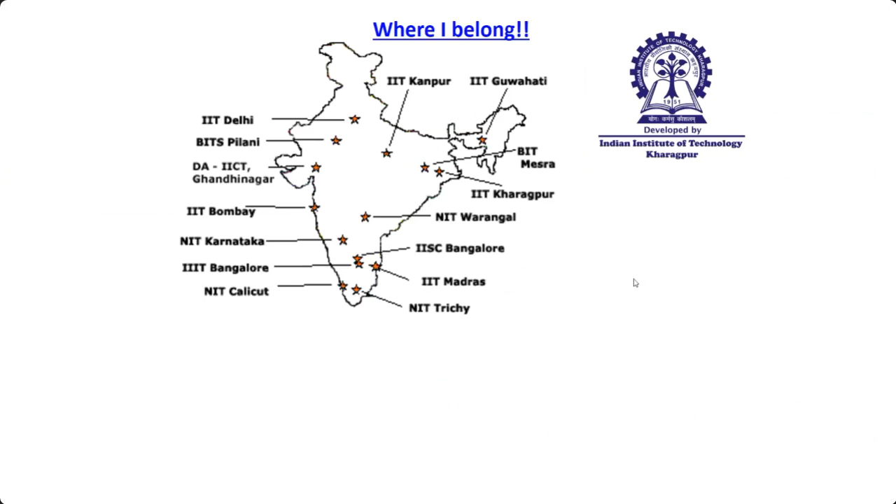At the first point, let me show where I belong. I come from this IIT located at the eastern part of the country. This is the first IIT for the entire IIT system, established in 1951 by our first Prime Minister, Pandit Jawaharlal Nehru. We have a strong history in that our campus is actually located in a Hijli detention camp, which was a jail for the freedom fighters of then-dependent India. When the motto was to create a university which could cater to the strength of the country, it was developed here.

Our institute's main motto is inscribed here as 'dedicated to the service of the nation.' We strongly believe in those aspects.

The broader research activity we do is basically to correlate the microstructure and mechanical properties of materials - different kinds of materials. We work extensively on nickel titanium based shape memory alloys with wonderful properties, on titanium based intermetallic alloys capable for high temperature applications in aerospace industries, and several other titanium alloys. Of course, metallurgy always stands on steel, so steel forms our main pillar. There are several categories of steel we work on, as well as super alloys, both conventionally processed and additively manufactured.

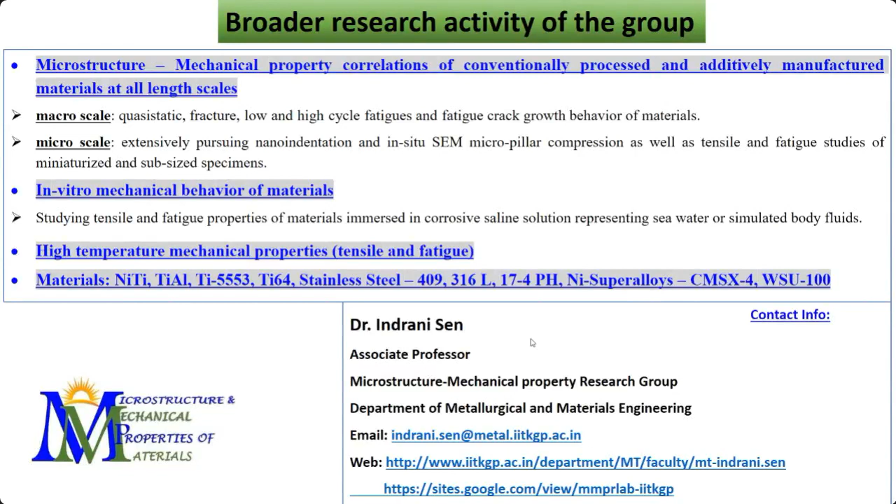So when we, as metallurgists, talk about process systems, we think of several kinds of processing operations for a component, like casting and different kinds of machining, which are inevitable. These are some of the ways by which we try to give a block of material a particular shape. We apply several kinds of machining operations like turning.

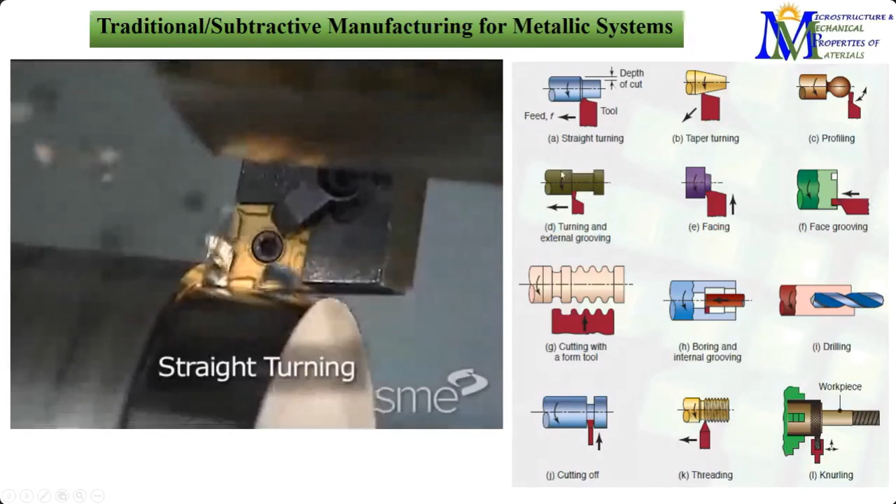Let me just show a video, and since there is no sound in it, I will explain it myself. You see, this is a kind of straight turning where we apply the tool to turn continuously so that we can give it a particular shape. In the process, you can see that there is a lot of chips coming out.

So this is another way of turning that is being shown. Several kinds of operations include taper turning, where we can get a taper, something like this. Of course, there is a lot of mechanics behind each of these operations, and I'm sure you might be familiar with them.

So what we can see here is that to get a nice shape for the purpose it is meant for, after casting the materials, we have to go through a severe amount of processing to give it the final shape and the required properties that it is meant to have.

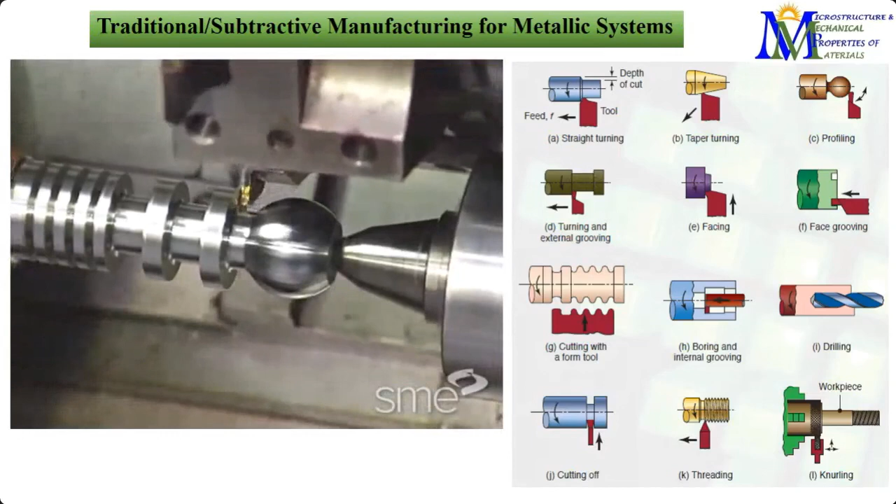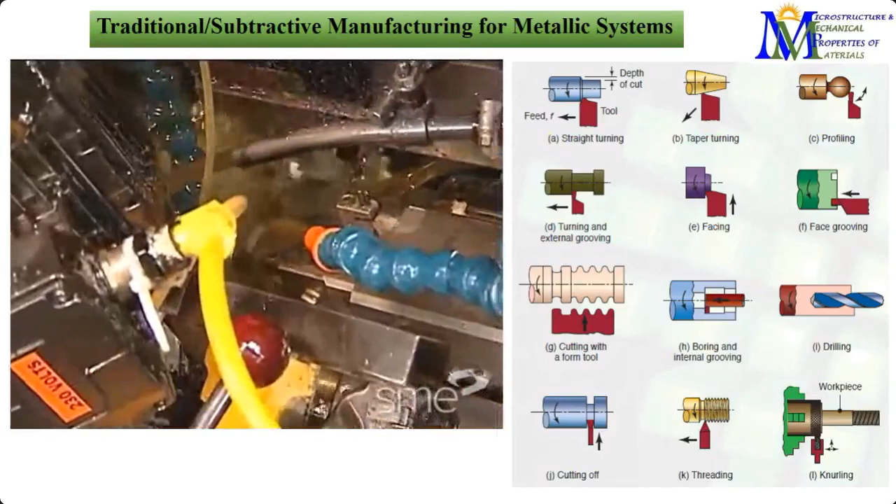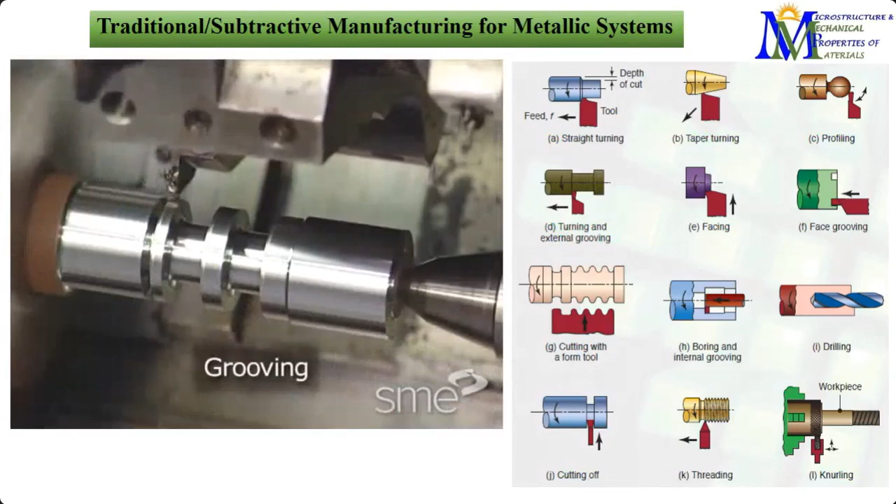So this is a kind of forming operation. And chamfering, which is necessary to give it a 45-degree inclination. And this is grooving - often we need to do internal grooving as well. Threading, you can see the threads very distinctly here. So these are the different operations that we need to do.

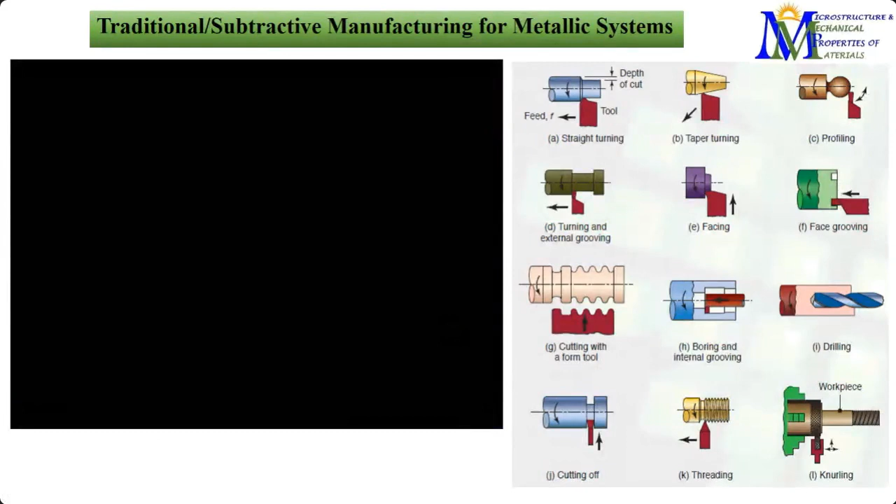But when we think of that, this is associated with a large number of problems, in the sense that we always strive for better material, meaning higher strength and hardness. So the higher the strength of the material, the tool needs even more hardness compared to that. When we are continuously machining, there is a huge amount of tool wear. So there are a lot of studies going on to make the tool material strong enough to handle components of materials like super alloys, which are much stronger, and we need such kinds of tools. Wearing of the tool is a huge issue.

There is, of course, undesirable chip formation - you see the chips everywhere. We need to do some after-processing to get rid of this chip, and basically this is just a wastage of material. We have to waste more than 50% of the material just to give it the final shape, which is very challenging considering the entire cost of the component. So this is how conventional subtractive manufacturing works - we have a block of material to which we give the particular shape we want, and in turn there is a huge amount of material that is just wasted.

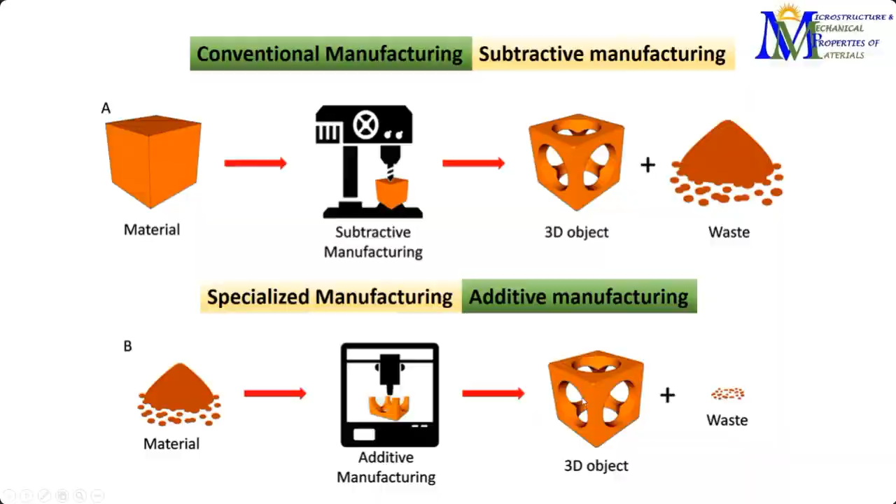So basically, subtractive manufacturing is nothing but a top-down approach - we start with the bigger piece and gradually move on to the shape we require based on several kinds of operations. On the other hand, additive manufacturing starts with the powder, so it's a bottom-up approach. We start from the lower level and keep on adding layer by layer to finally reach the shape that we require.

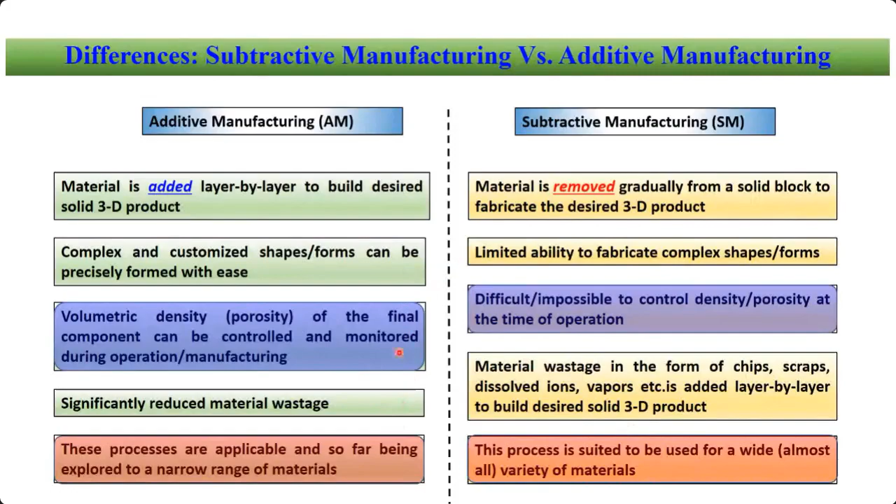Now moving to additive manufacturing itself, we have already established that it is the future. There are a lot of opportunities and several things that need to be explored. We also need to understand the challenges—of course there are several advantages, but what are typically the challenges that need to be overcome. First, we can get complicated shapes, but it is very challenging to have fine accuracy at every nook and corner. Often the surface finish is an issue, and we need to ensure a suitable surface finish.

Now, from both the metallurgist's and mechanic's point of view, when we think of a particular application, let's say aerospace, we are very much concerned about properties like fatigue—how the component will behave under cyclic loading. If we are not able to ensure proper surface finish, that will be very detrimental for the fatigue performance of the material. So we can have a complicated shape and all different kinds of benefits from additive manufacturing, but we can still end up with early failure if we don't ensure this particular aspect.

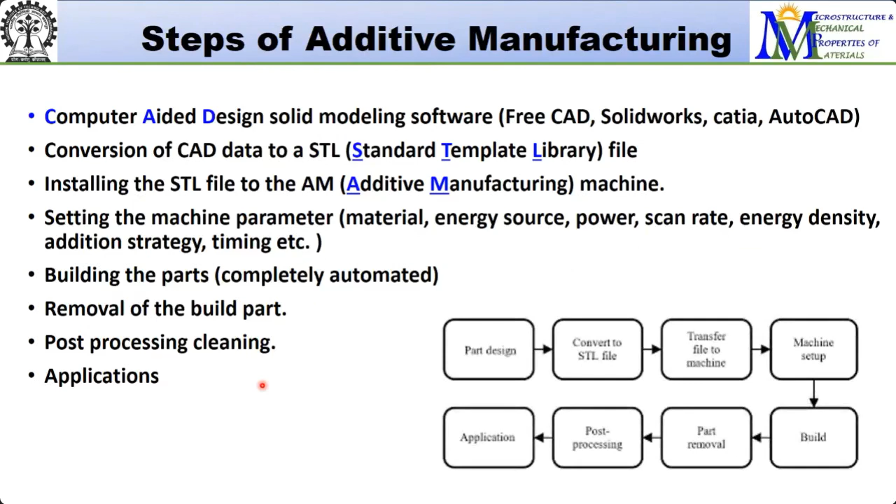Okay, so these are just the flowchart for that.

There are different kinds of additive manufacturing processes. According to the ASTM F42, there are seven different ways. Out of that, the ones mostly suitable for metallic systems are the powder bed fusion or powder feed technology. Amongst the powder bed, there are different kinds: electron beam melting, selective laser sintering, selective laser melting, and direct metal laser sintering. Whereas in case of powder feed, we have LENS, laser engineered net shaping, and direct metal deposition or laser metal deposition. These are the principal operations that we use.

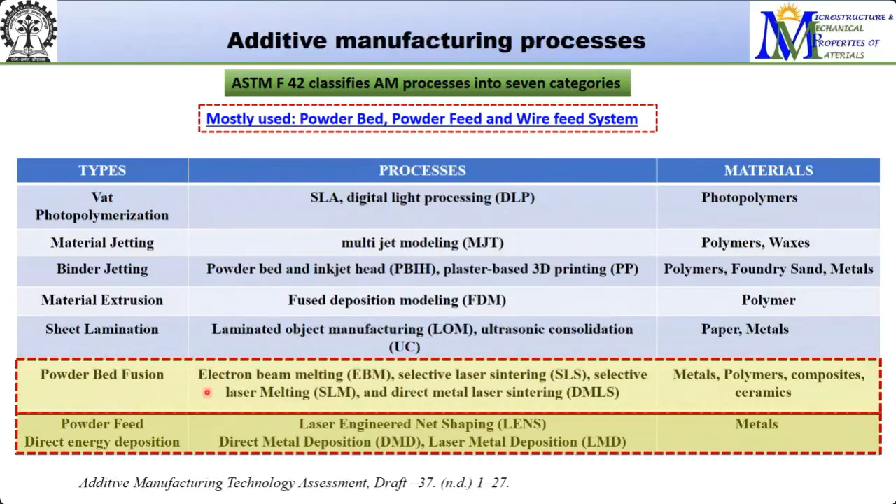Basically, we have different kinds of heat sources: laser beam, electron beam, plasma arc, gas metal arc. All different things are used as energy sources, and out of that, laser beam is the one which is mostly used. Electron beam is also very much used, but laser beam is the most widely used.

As I said, the major two types of additive manufacturing techniques mostly used for metal additive manufacturing are powder bed, where we have a nice bed of powder and the energy source travels as per the design, and we get the product out of that. In case of direct energy deposition, often called powder feed, the energy source as well as the powder stream act simultaneously as per the design, and then we get the final product.

So these are the different techniques for powder bed as well as powder feed. I would like to show these two different things, one from each category, to show how these are being done.

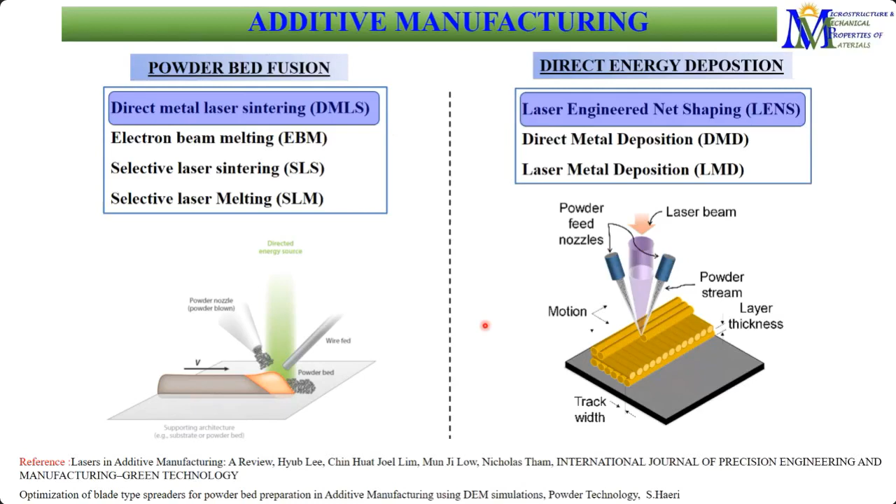Okay, once again I'm having a video here. This is for the direct metal laser sintering.

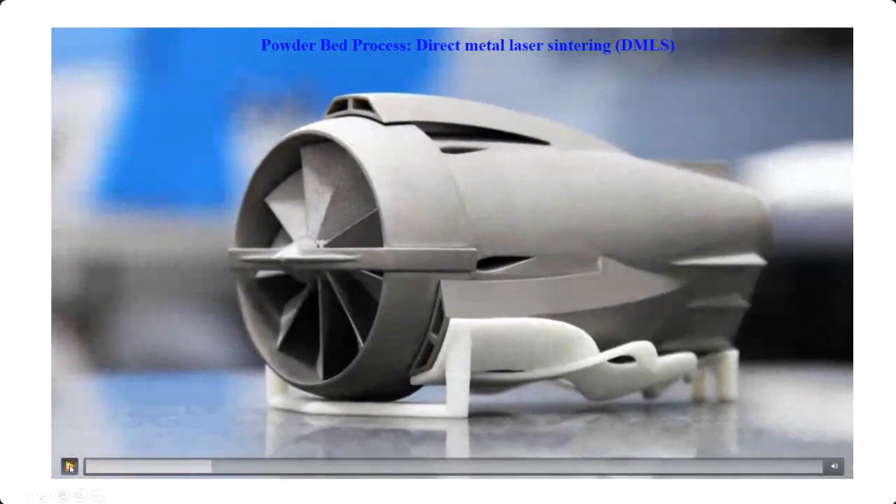So once again, I confirmed with Professor Dinakaran that the sound is not audible, right? It is still not. Yes ma'am, sound is not audible ma'am. Sound is not audible. Okay, yes, so I will just go ahead with this.

This is how it is being made, and the video explains it elaborately.

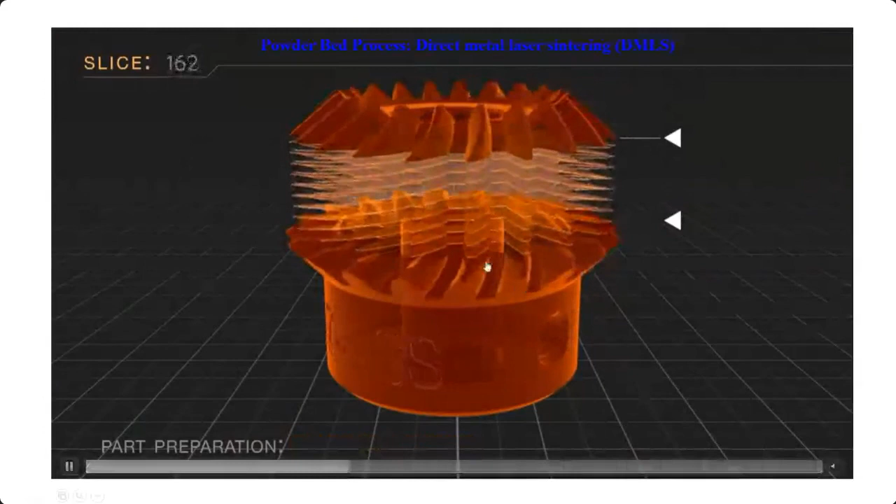So such a giant structure is being made. This is a kind of stainless steel that they have used for aerospace application. These are all the layers being made as per the design.

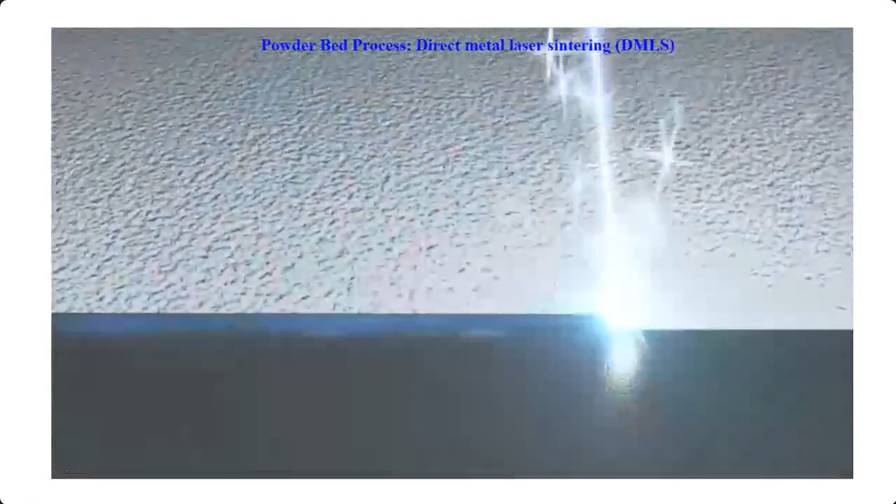So this is the powder bed that is being formed. Again, a powder bed, and then the laser moves as per the direction, as per the shape. And this is how it's going, the thickness.

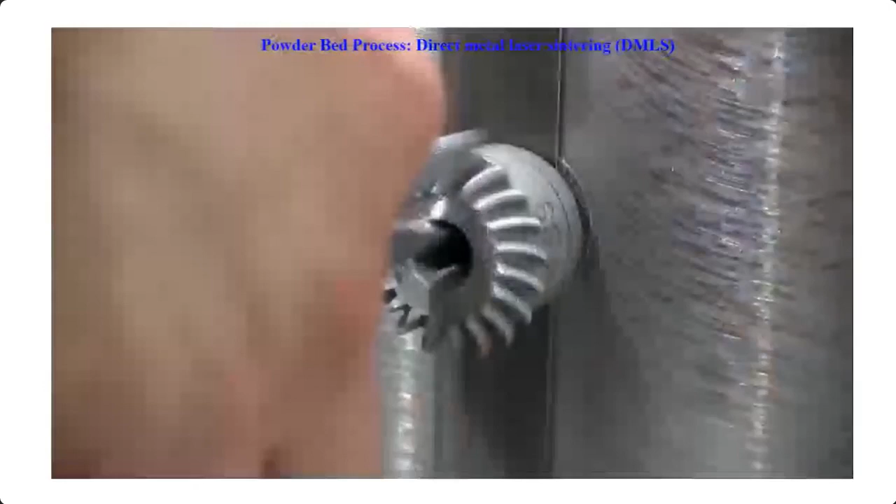Now removing it from the base plate is also sometimes very much challenging. So all the support structure and everything needs to be removed and needs to be polished to have a smooth surface finish.

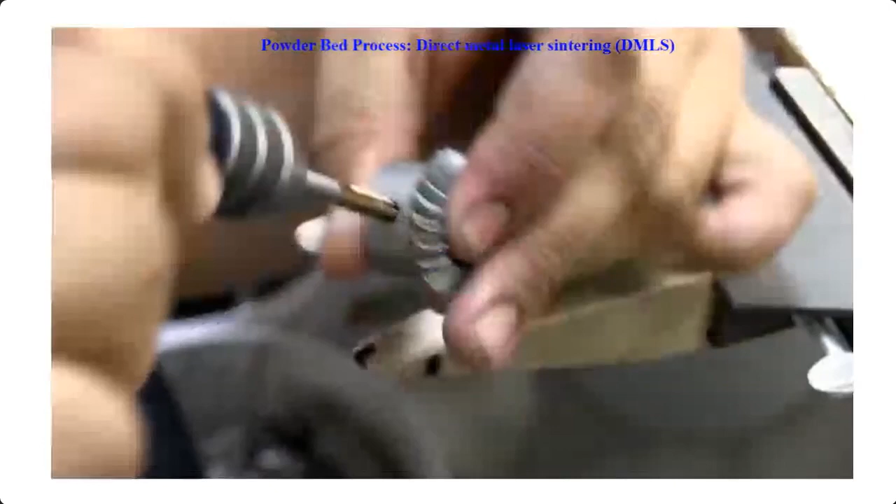Often DMLS is used for aerospace, for surgical implants, for different kinds of tools. That is where we are going to use this. This is the laser engineered net shaping system, which is a powder feed technique. So it's not a powder bed anymore. We apply the energy source as well as the powder simultaneously. This is just a system from Optomec that has been shown here. So there are the dual powder feeders.

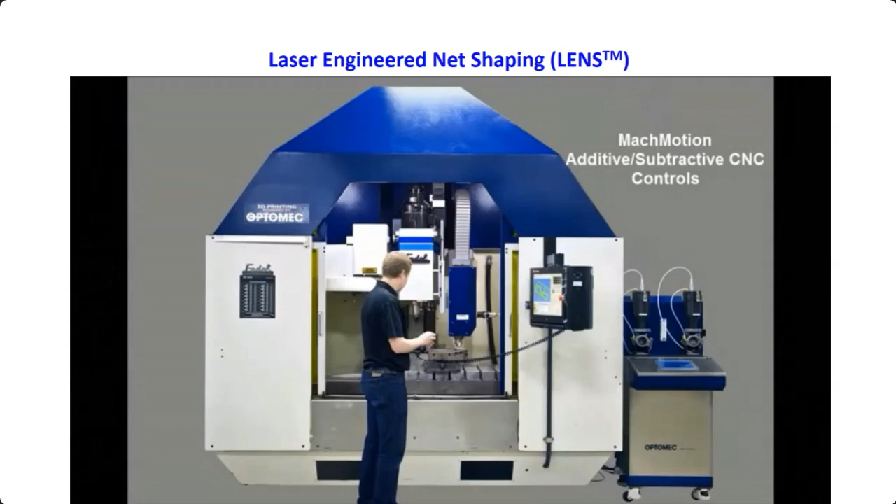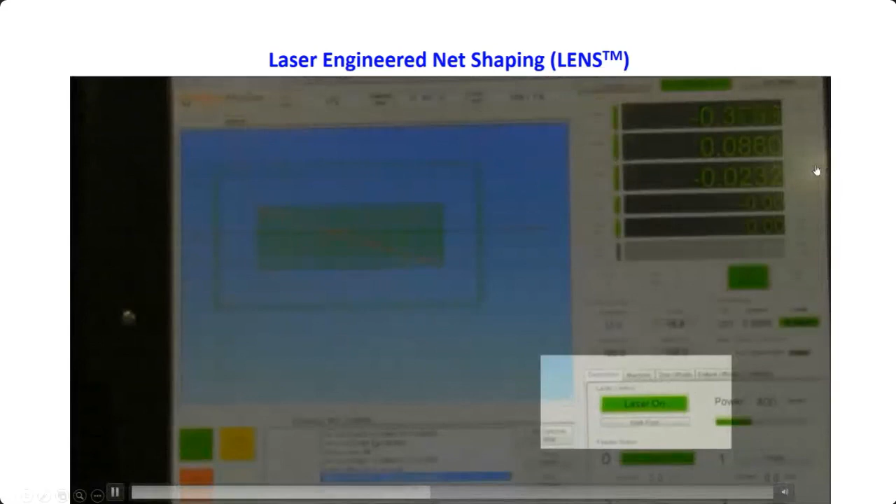So this is repairing a key. This is another very good application of additive manufacturing, and LENS is often used there. So if some part is broken, we do not need to replace it. We can simply remove that.

So you can see that the powder and the laser coming from the same place, and it is doing this according to the scanning. In the next step, we will see that it has been reoriented to 90 degrees to the previous layer, so that finally we are going to get a uniform structure as much as possible.

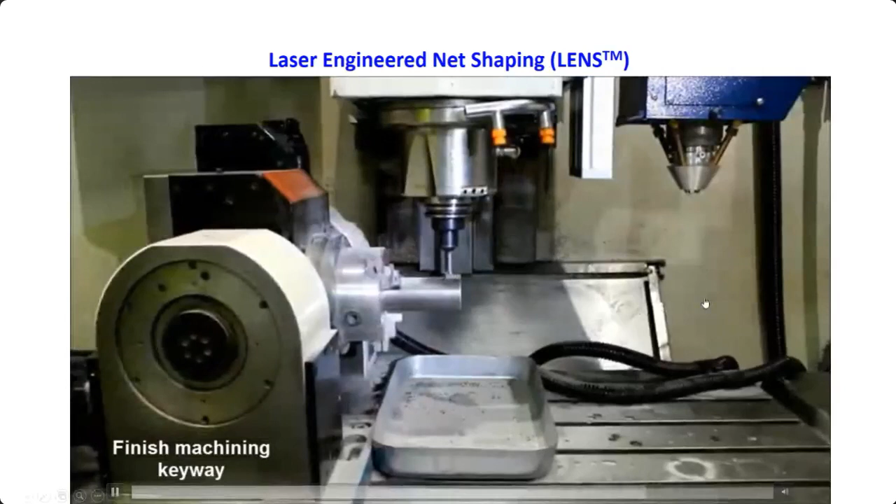Often this angle between the different layers is varied. It's not always restricted to 90 degrees.

Coming to the metallic systems which are mostly additively manufactured, we have seen that there are several metallic systems which are very much highly explored in case of additive manufacturing. The primary being stainless steel, of course, and then we have aluminum, titanium, cobalt, chrome, superalloys, nickel superalloys, and some precious metals also. So at various fields of applications, these are being used.

Aerospace and medical form the major part where additively manufactured materials are already in use. Partly also because aerospace and medical fields are always exploring new things. They need to ensure that whatever application criteria and properties are required are met, and how best we can do that.

In case of aerospace, one significant advantage of using additively manufactured components is that we often get rid of the additional attachments. For example, if we need to fix one component to the other with the help of welding and rivets and all. In case of additively manufactured things, we can get rid of such additional parts like the rivets or the weldings, and this has often been seen to cause problems and lead to various catastrophic failures in case of aerospace application, also for medical. So with additively manufactured components, we can minimize the chances for errors or early failures.

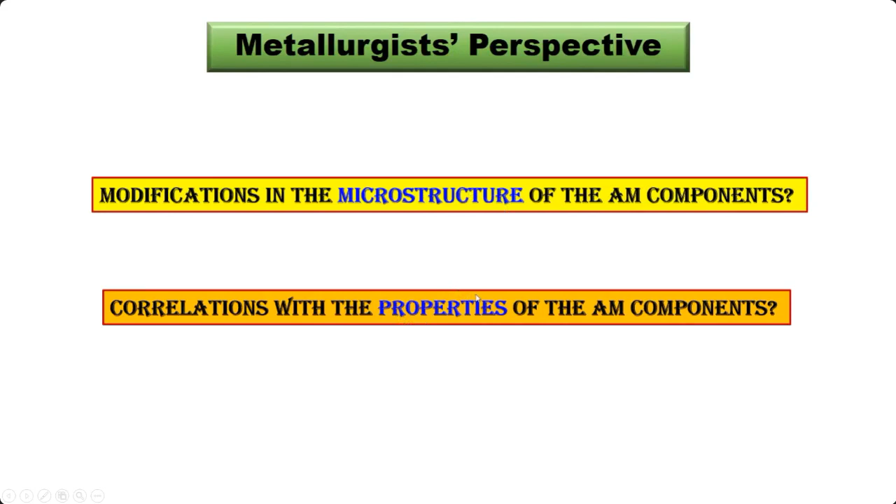So based on the industry using these additively manufactured components and based on the particular application area, we would like to control the microstructure and in turn have the properties of our requirement.

There is only a smaller part which is being melted, and then it gets solidified as the energy source moves to the adjacent, neighboring part, and this leads to a very strong distribution of temperature, and temperature gradient will also lead to variation in the melt pool.

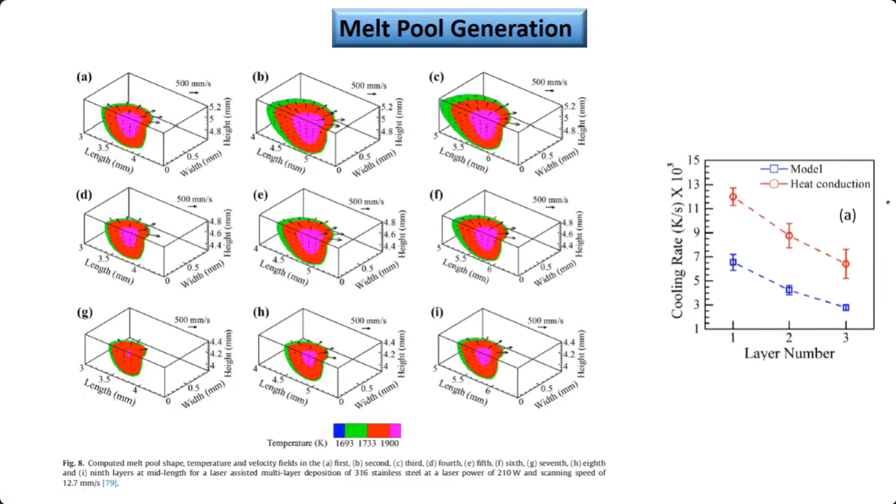Now all this is finally affecting the formation of the microstructure there. So when we talk about microstructure for a metallic system, we think about the grain structure. This is the very basic, the backbone of the microstructure. So we have a grain.

There are different ways by which the atoms can be arranged, and we can have different kinds of lattices, and these lattices finally organize up to a certain extent. That is a grain, and it forms a boundary. That's the interface between two different grains where the lattices are oriented along different directions, and all this very much affects the properties of the material.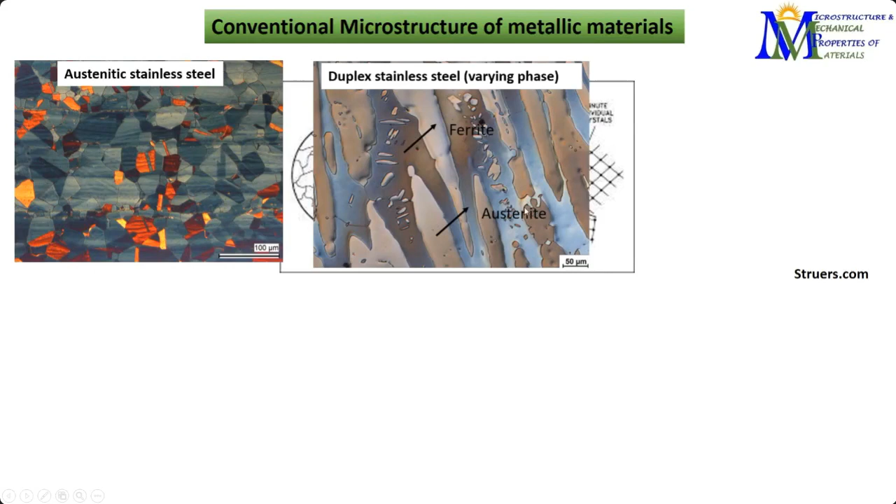This is austenitic stainless steel, which has the grains very much prominent here. You can see varying phases also, the bluish phase versus the grayish phase here. These phases, ferrite and austenite, have completely different properties.

Then we can have slips and twins that will lead to, or assist, the deformation, and depending on the presence of these, we can also have different variation in the properties.

This is an aluminium welded structure where we see different variation of grains here. So the columnar grains and equiaxed grains of different orientation. This color signifies the different orientations that the grains are aligned.

This is a pure copper one, and this is the copper alloy having different phases with completely different hardness. So this is typical of what we get from conventional systems.

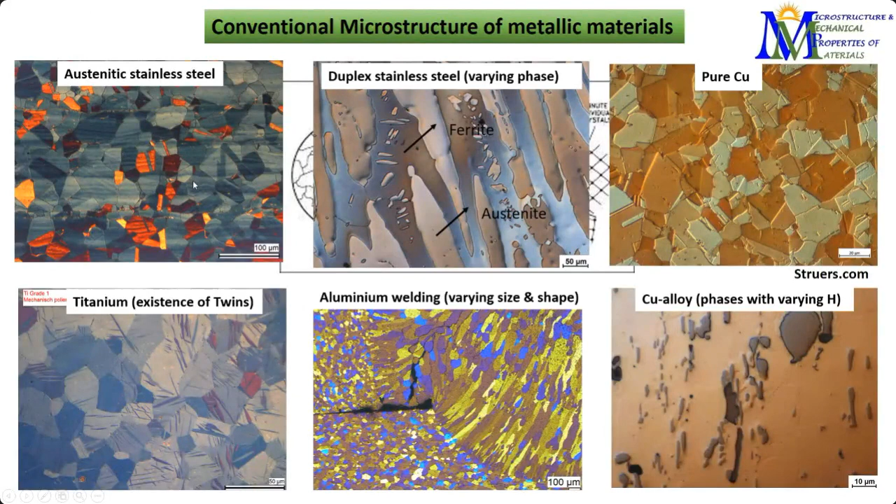Now when it comes to additive manufacturing, whatever this kind of structure is, we expect this structure to be uniform all throughout. So the entire component, if we take a cross section and look into the microscope, will show us grains like this at any point, be it at the top, bottom, or anywhere.

But in case of additively manufactured parts, we have a completely different scenario. There is a difference in the melt, cool, and heat distribution, as I said, and that leads to variation in the microstructure within the same structure itself.

What eventually we get in the additively manufactured component is a modification in the microstructural size as well as the morphology. We may have, even if we have equiaxed grain, fine equiaxed and coarse equiaxed, and then there can be columnar grains versus equiaxed grains.

We may have different kinds of phases altogether, and this difference in phases is not only with respect to the conventionally manufactured materials, but at one zone, at the top layer versus the bottom layer, we may have differences in the microstructural size, morphology, phases, as well as the composition.

Although we start with the same powder, we end up having different kinds of composition at different zones. It's possible, and the extent to which this variation occurs is dictated by the various processing parameters that are imposed during the additive manufacturing process itself.

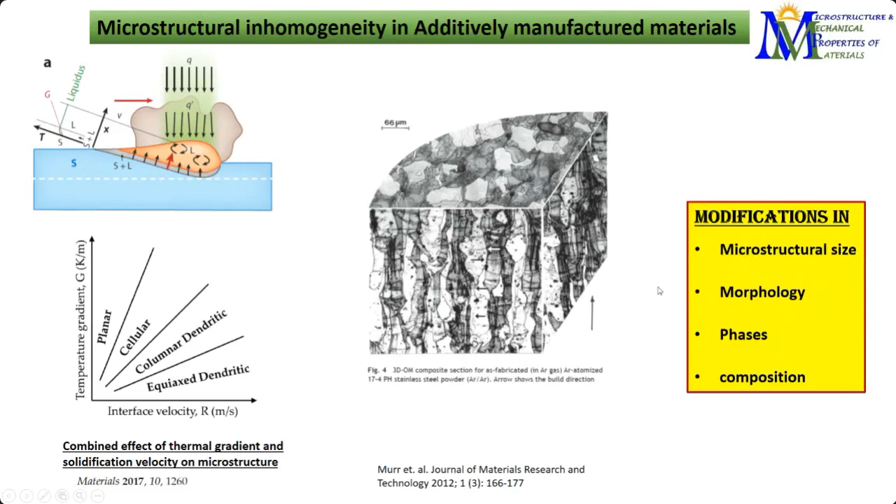This is what is being shown: if we have a 3D component like this, and we cut it at several sections, we will have a completely different microstructural lookout. This is the XY plane versus YZ plane - you can see there is a complete difference in the microstructure, and this changes at every layer. This is the build direction, and we can figure out the layers and how these are being made.

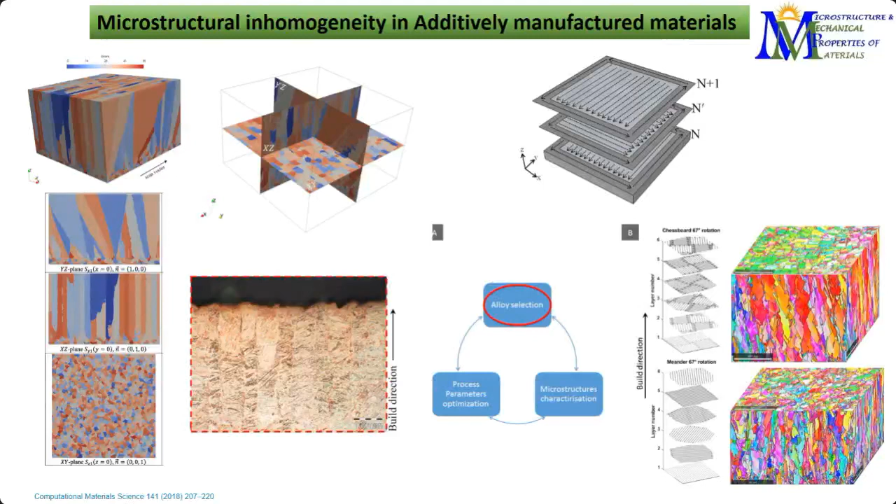If we do this analysis at different sections, at different angles, we will see that there is a complete variation in the microstructure, and that means there will be complete anisotropy in the properties. The properties at these different layers will also be different. Although subtle, there can be huge differences between the top and bottom versus the cross section and the perpendicular, and so on. Finally, we do not want our component to fail by being stronger in one direction and weaker in the other, so we try to homogenize it as much as possible.

These are the typical features that we would see in additively manufactured things. The first thing we notice is this kind of fish scaling, the hatch spacing and all, which I will discuss a little bit more.

But other than that, there are some defects that are formed - there's some balling effect, some unmelted part that can retain there, and there could be some hot tear between the layers, and this could lead to weakening the structure and could lead to some failure.

Since one of my focuses is also to study the mechanical properties, particularly fatigue, such kind of cracks in between all these balls are very bad news for the fatigue behavior of the material.

Also, everything is under control - we want to get a final shape, we give them the design, the machine is actually doing it layer by layer wonderfully, but still there could be some mismatch at some point, leading to some unmelted zones or some tears or cracks that are forming, which can lead to discarding the entire component as a whole. So we have to be very critical about setting the parameters to get the thing that we want, and before that, we need to evaluate it thoroughly.

So even if we are able to manufacture a component, that is not the end of the job. Our task, being a metallurgist, starts from there - to ensure that every part has been made with whatever is required to attain the properties that it's meant to have.

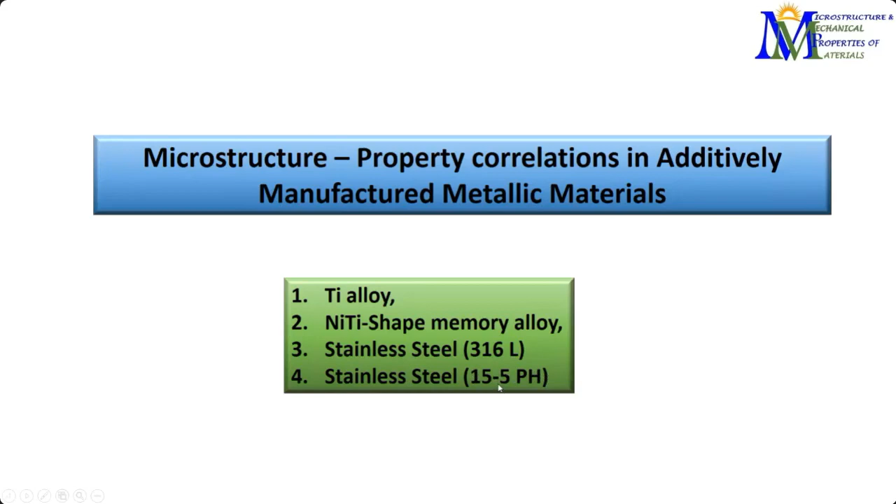So let's just move on with the microstructure-property correlations. Before going on to these 4 different materials, I'd like to give you a brief understanding of how this microstructure and properties are correlated.

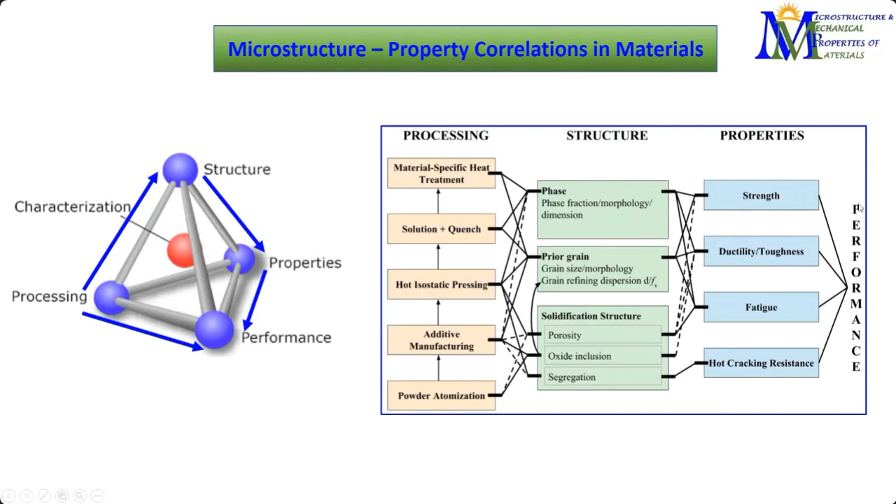So we have seen that in case of additive manufacturing, it has an influence on almost every aspect of the structure: the microstructure, including phases, grain sizes, morphologies, densification, porosity, segregation, etc. These lead to variation in important properties such as strength, ductility, toughness, and fatigue. Hot cracking resistance is often related to segregation of different phases, which finally dictates the performance. So moving on to the most commonly used titanium alloy, it's titanium 6 aluminum 4 vanadium.

That's a two-phase titanium alloy. It has two important phases, alpha and beta. The alpha phase is a comparatively low temperature phase, which at high temperature converts to a beta phase, having a completely different crystal structure. Alpha has an HCP structure and beta has a BCC structure.

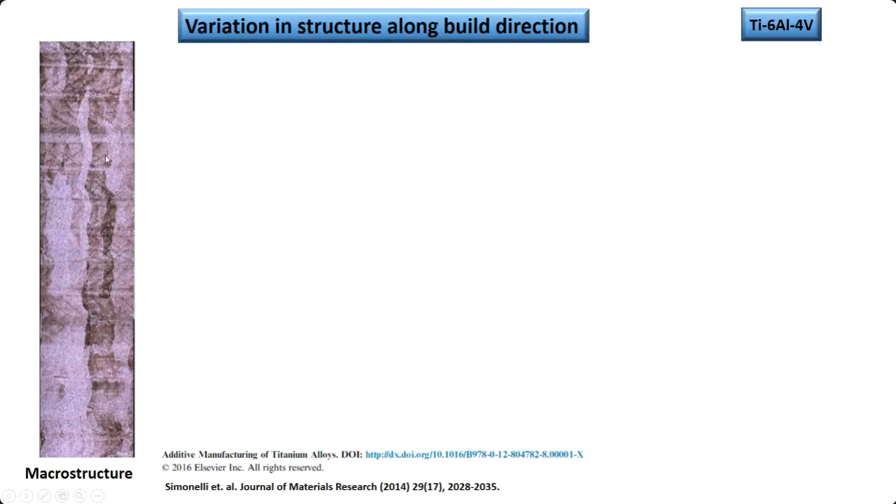When we look into the additively manufactured structure, this is how the macro structure looks like. You can see these bands here very clear, and this signifies the grains; the prior beta grains can also be seen here, quite big. If we investigate the microstructure at different levels, at different layers starting from B to G, you will see distinct changes in the microstructure. This is very much fascinating.

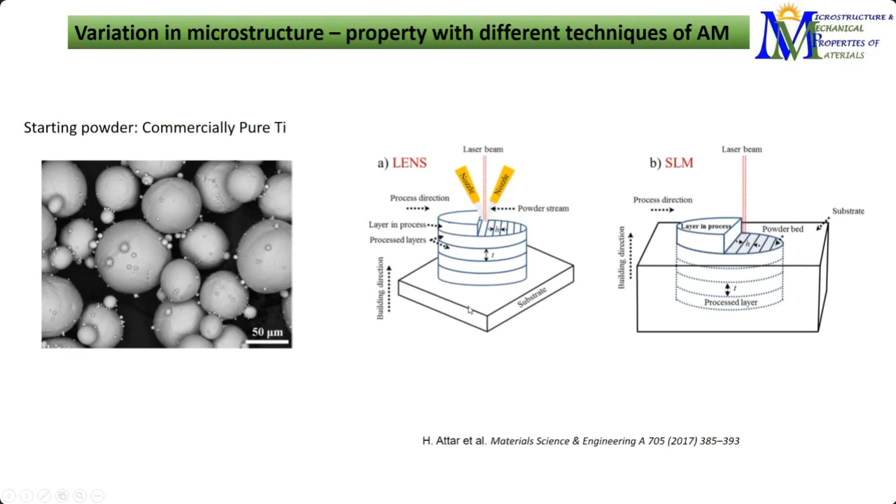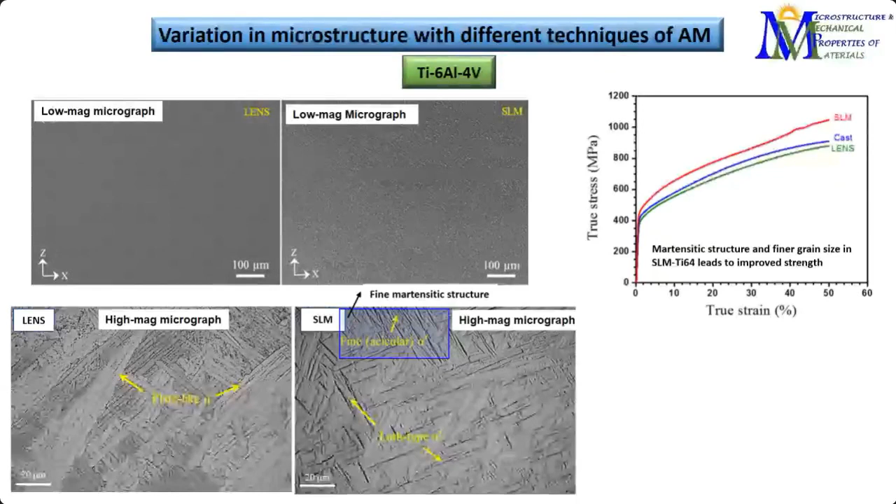This is the stress strain diagram, and we see that while the cast one, the conventionally processed one, and the LENS one are more or less comparable, the SLM one, because it produces this martensitic structure, gives us higher strength, higher UTS before failure. So SLM could be preferred in that sense. Now, we shouldn't just be happy with the statement that SLM gives us a better structure—again the question is why and how.

To answer that, we need to understand that for each of these processes, be it SLM or be it LENS, we can vary the processing parameters: the power, the scan speed, as well as the powder flow rate, to end up having completely different kinds of microstructure.

So we now have a way to figure out which kind of microstructure we need to attain the properties required. It's not always mandatory that we strive for higher and higher hardness, because higher hardness also comes with lower ductility. So we have to optimize the processing parameters to end up having an improved property.

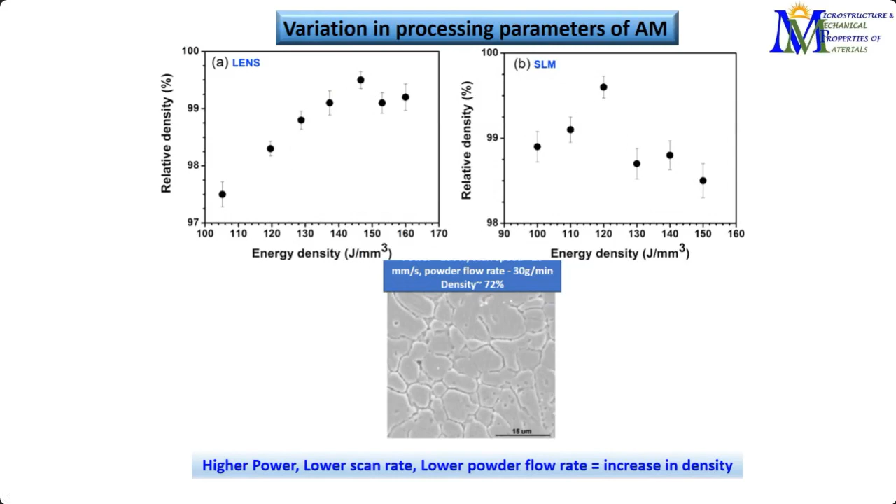While doing that, there has been a study to find out the relative density. This is a very important part, because if we are not producing a dense component, and if we end up having porosities, voids, or unmelted zones, that could lead to failure in several ways. What we can see here is that in the case of LENS-processed specimens, we can achieve maximum density, more than 99%, at an energy of around 146 joules per millimeter cube.

Whereas in the case of SLM, because of the differences in the techniques, we can achieve the same amount of relative density but with a much lesser energy density.

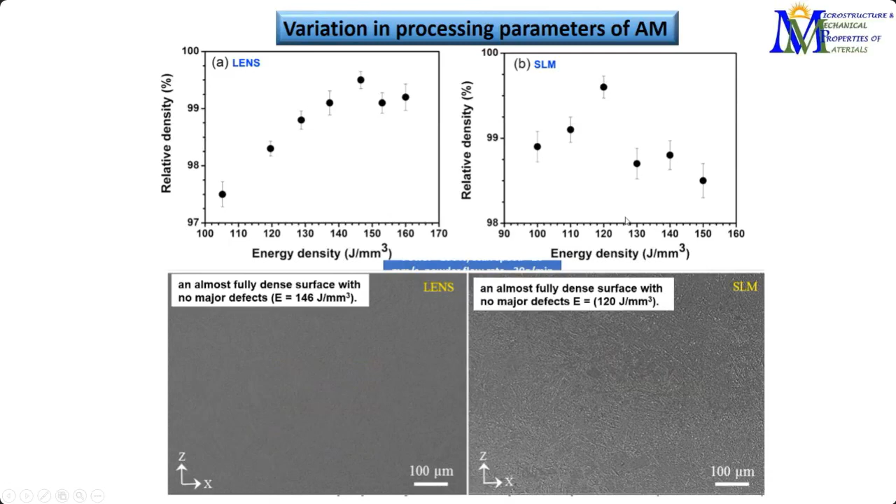So we have to ensure that we use the right energy density, changing the processing parameters accordingly. If we use an energy density of 146 for the case of LENS versus 120 for the case of SLM, we end up having a completely compact structure with no such defects. So SLM requires lower energy, so it should be cost effective, and we can also change the phases. We may form martensite, which is good news if we are talking about the hardness of the material.

So based on the requirement, we can figure out which technique is suitable for a particular application, and we can go ahead with that.

What we can take away from this part is that there are huge differences in the microstructure and the properties along the build direction, from bottom to top, with variation in microstructural size, morphology, and phases, leading to differences in properties. Different AM processes, be it SLM versus LENS or other processing techniques versus the conventional one, influence the microstructure and properties in a big way. We have to correlate that very methodically and systematically to use it for any particular application.

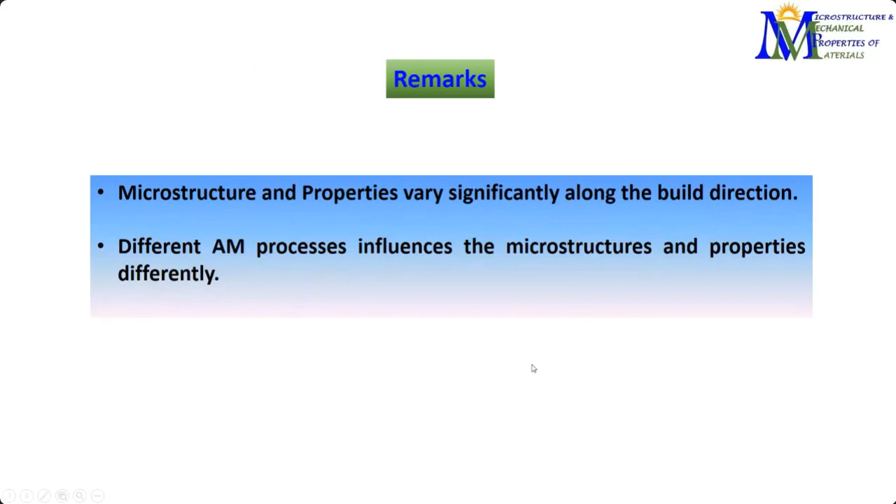So next, let's move on to nitinol, a very popular name. You must have heard about this, nitinol, which is used as a smart material. It's a functional material used for various smart applications.

Before going into the details of the additively manufactured, we have worked on something on the lens processed nitinol, and before that I would like to give a brief introduction of this system, because it is very unique, and to ensure all of you are familiar with what we are talking about.

This material also has two different phases. One is called austenite and another is martensite. It's completely different from the martensite we have just seen in case of titanium, or what we regularly see in case of steel.

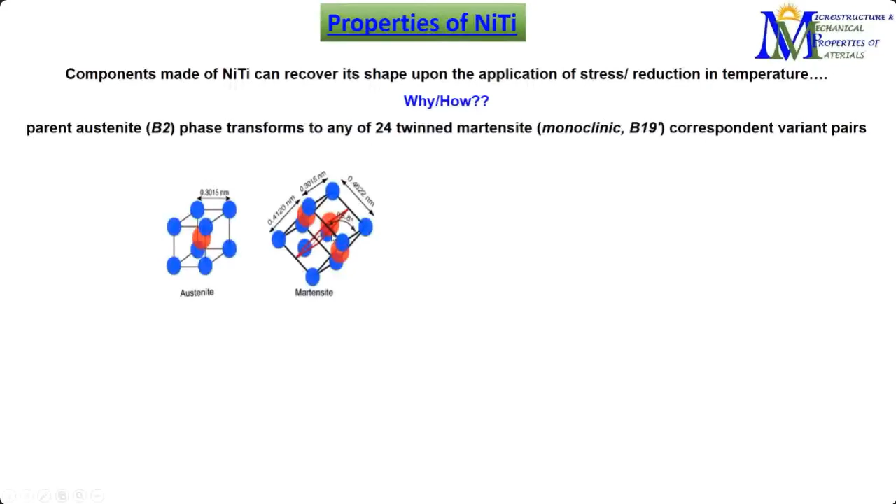This has just two different crystal structures that can be achieved if we apply stress or temperature. If we have the initial structure as austenite, which has a cubic structure, and we apply stress to it, it is going to transform to martensite, which has a monoclinic structure.

If you keep on adding stress, there is a huge amount of strain generated, but only a minor amount of stress is required, and it basically does a detwinning of the martensite. Initially it formed a twinned martensite and it gets stretched out, forming detwinned martensite as we keep adding stress, and we get a large amount of strain.

Now the beauty is that if we unload, simply by removing the load, we can go back to the initial austenite phase, and this entire amount of strain can be completely recovered. That is why it is called shape memory.

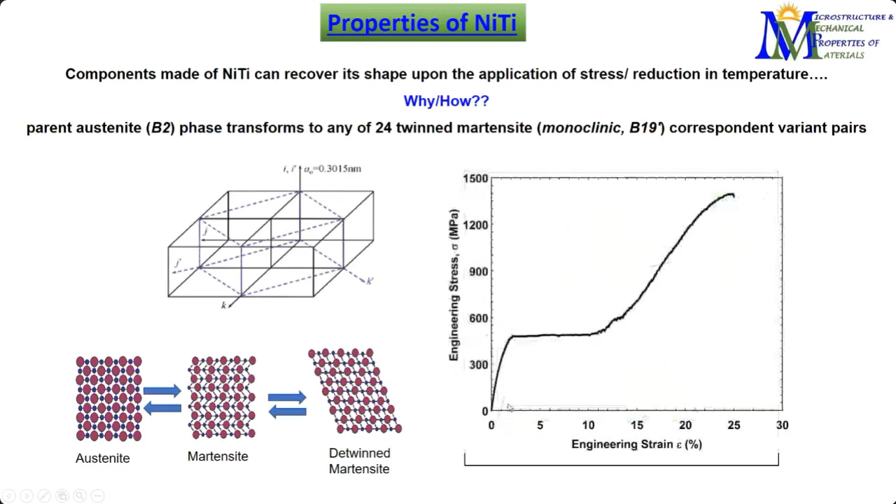Whatever shape change happens looks like the typical stress-strain curve, but this part can actually be completely recovered. Up to this point, without the unloading section, it looks like a typical stress-strain curve, but what it actually does is completely recover its shape back.

Now this has various applications. It's used even for the wheels of lunar vehicles, the lunar rover as it's called. The wheels are made of this nickel titanium, which can go ahead with any kind of rugged surface, because it does not have any plastic deformation.

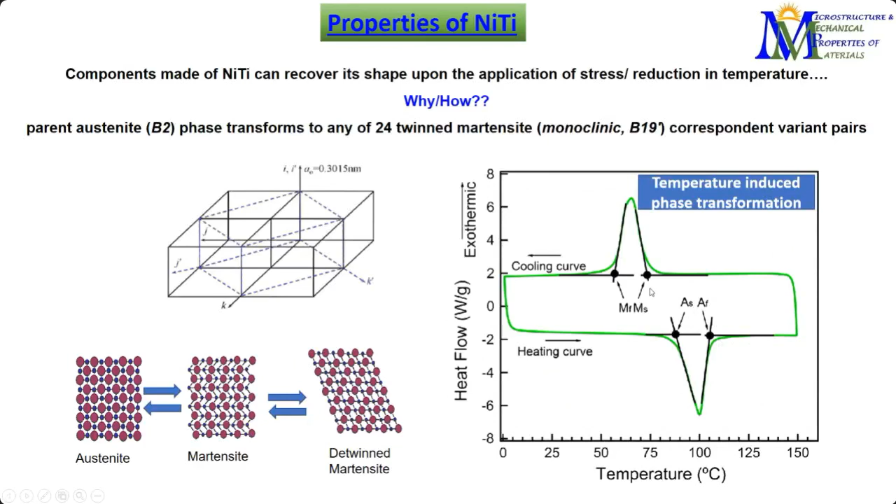All this phase transformation that we achieve with stress can also be achieved by changing the temperature. At one particular temperature it changes from austenite to martensite, and if we reheat, we get back to austenite. So this is a completely reversible hysteresis that can form.

As I said, it's used in very niche applications like lunar vehicles, but most commonly this material is biocompatible, so it's also used for various medical applications and implants.

One very important application of nickel titanium is in cardiovascular stents, used to remove clots in our arteries when we have a cardiac arrest because of cholesterol problems.

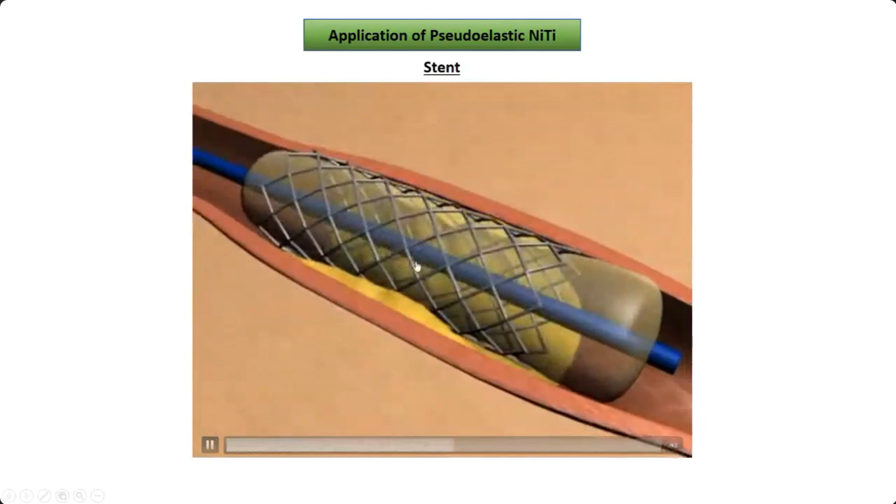You can see an artery where blood flows and there is a clot here. If we use a stent made of nickel titanium, because of temperature and stress it can expand and have a different shape, which expands the blood vessels, removes the clot, and lets blood easily flow through. That's a very nice application of nickel titanium, and it's being largely used.

Now, when talking about medical applications, we often need very complicated shapes and miniaturized components, hardly a millimeter in size. This is also used as sensors in MEMS, so we have micron-sized devices and implants that need to be made, and often we take advantage of additive manufacturing to make that.

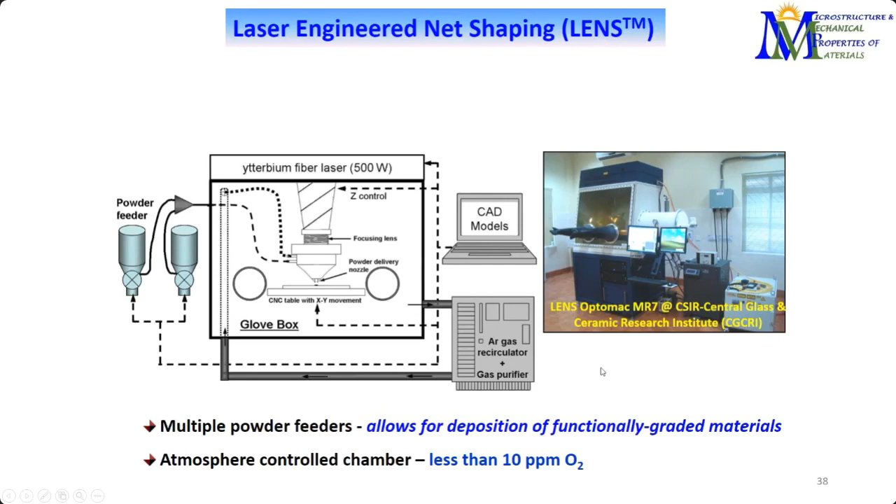For this particular one, we used a LENS system to make the nickel titanium component, and in the process we varied the processing parameters. We used 3 different laser energy densities, from 27 to 70 joules per millimeter cube, varying the laser power, scanning speed, diameter, etc., resulting in 3 different laser energy densities, although we started with the same pre-alloyed nickel titanium powder.

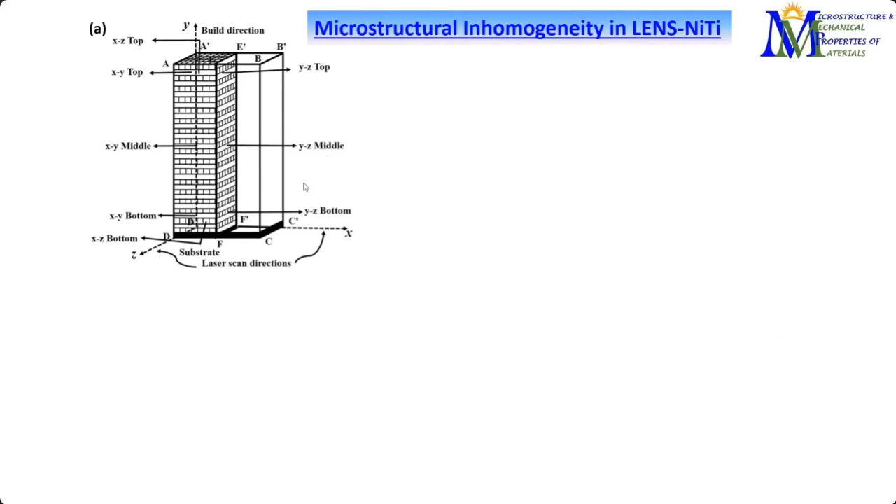For a particular location, we've named these conditions E1, E2, E3, where E1 is made with the lowest energy and E3 with the highest energy. We can see there is a complete difference in the microstructure. This is the typical optical microstructure in the tint etched condition, showing how we can generate this colorful microstructure optically.

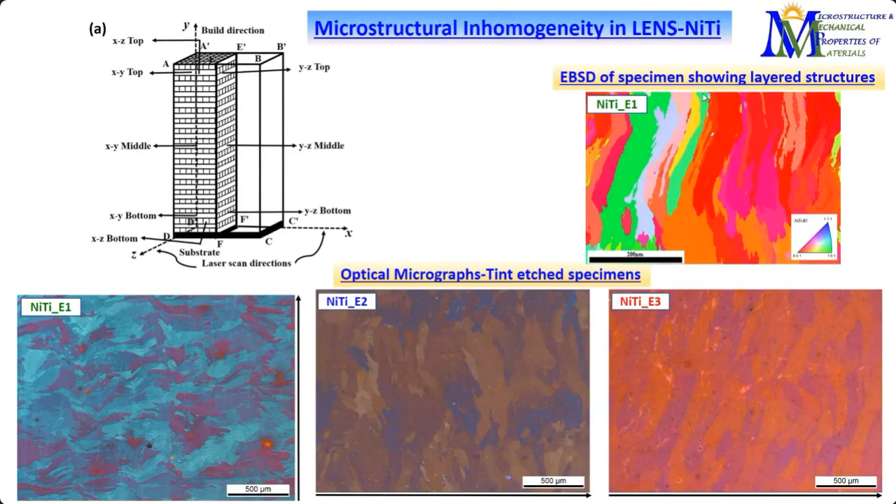This is the EBSD image, which shows the layer structure very clearly. Going into more detail, we've seen this kind of layered structure with hatches present, very distinctly visible. Based on the laser tip, we generate such hatch structures.

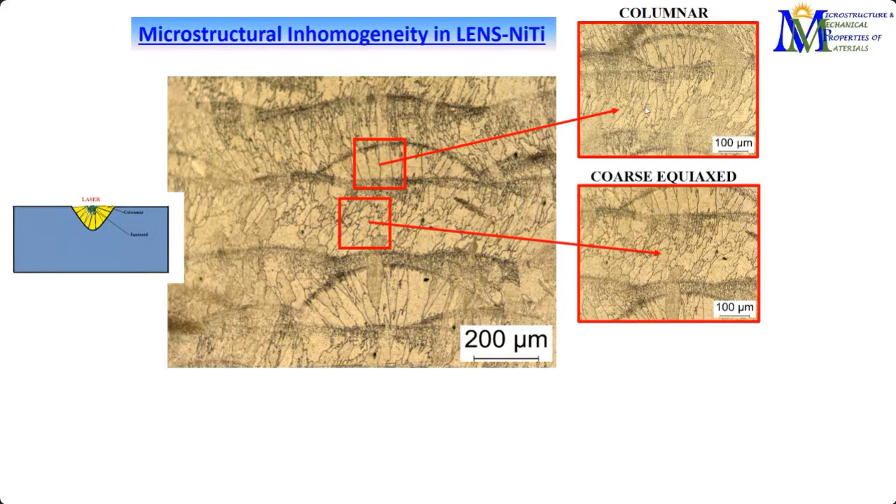Looking carefully, we see different morphologies forming: coarse equiaxed structure, columnar structure, and very fine equiaxed structures. The fine equiaxed structures have a grain size of 4 to 5 micrometers, whereas the coarse equiaxed one is about 5 times larger. Obviously this will have a huge influence on the properties too.

This is how the hatch structures are formed. We have characterized the hatch spacing and layer thickness, and seen that these vary distinctly for the three different energy densities used. Most interestingly, the sample prepared with the highest energy density has shown some precipitates forming, these are Ti-rich precipitates, which will certainly have a role to play in the properties of the material. We'll look into that shortly.

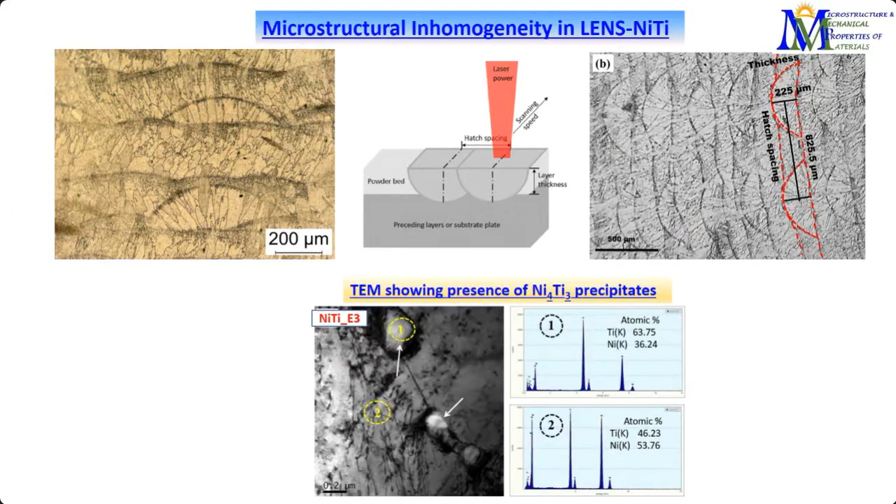Now another interesting thing is the porosity. As I said, porosity is something we can control. This video shows how we analyzed it through micro-computed tomography to see how porosities developed throughout the component.

This is for one particular alloy system made with the highest energy density, but comparing all three, we see that the one prepared with the lowest energy density has a lot of porosities. Considering our applications, whether these porosities will be beneficial or not, we can figure out what kind of processing parameters are necessary.

Porosities are, as I said, very much bad news for fatigue applications, where there is cyclic loading. For example, in stents there is also cyclic loading, since our blood gets periodically pumped as the heart periodically pumps. So there is continuous cyclic loading, and any kind of porosities or defects for such applications are bad news.

On the other hand, for bone implants, for example, porosity is often desired. Biomedical applications often require porosities of certain percentages, and additive manufacturing is of great help there, because we can control the porosities, the structures, and even their positions according to our need.

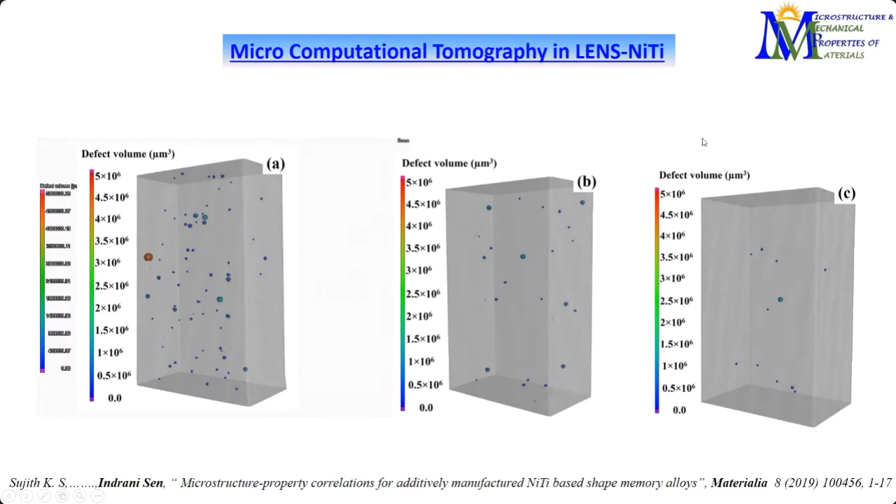For this particular study, we've seen that as we increase the laser energy density, the compaction is much better, and we end up with lesser and lesser amounts of porosities.

Coming to the phase structures, we've seen that E3, as I said, develops some amount of precipitates as well as some martensite phase. As I explained, the pseudoelasticity or shape memory effect comes from the transformation of austenite to martensite, so presence of any martensite actually hampers this process, and we end up having less recoverable strain in that case.

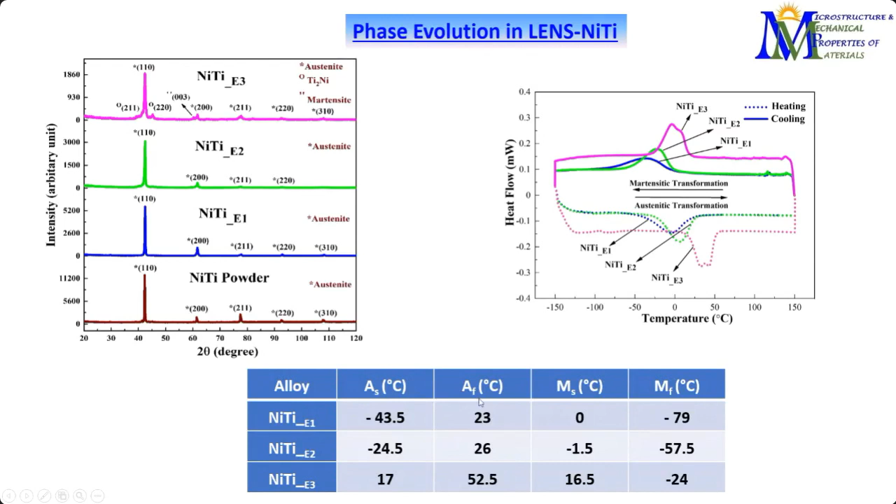This is also reflected in the DSC response, which shows the conversion from austenite to martensite due to temperature change. We've seen that the sample prepared with the highest energy density has an austenite finish temperature that is quite high, even higher than room temperature. This leads to some variation in the properties.

The first thing we did was macro indentation with a very high load of 500 Newtons, and we actually could not see any difference in hardness. We were very happy about that, although we changed the processing parameters significantly, there was no such effect on hardness behavior. But with micro and nano indentation, things are different. Particularly in nano indentation, we've seen a huge change in hardness, reflecting the change in the phases present and the local structures of the grains.

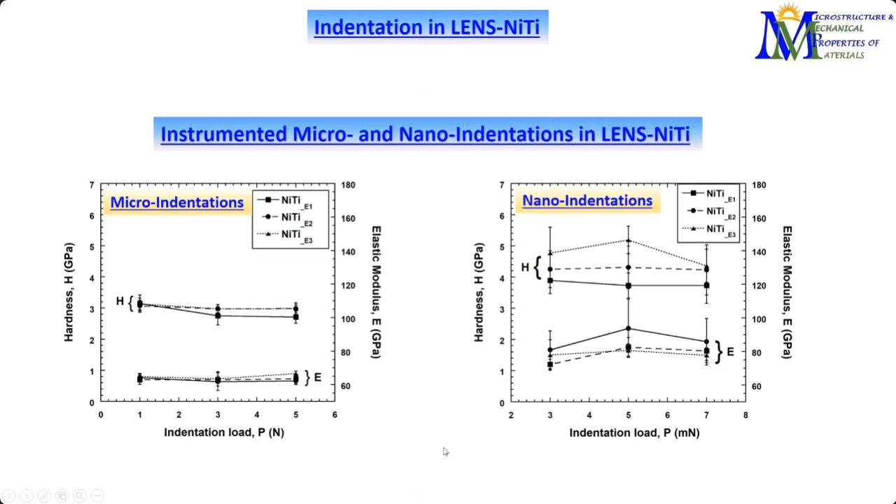Okay, so this is what we have seen: the presence of martensite and the precipitates enhance the hardness and elastic modulus of the alloy, which is produced with the highest energy density. So far people would have been happy that if we increase the energy density, we end up having lesser porosity and higher hardness.

But that may not be the case, since we are talking about a pseudoelastic material, capable of recovering its shape. We did nano indentation using different parameters specifically suitable for pseudoelasticity, which is beyond today's scope, but we characterized it to find out the local recoverability, the ability of the material to recover the strain applied.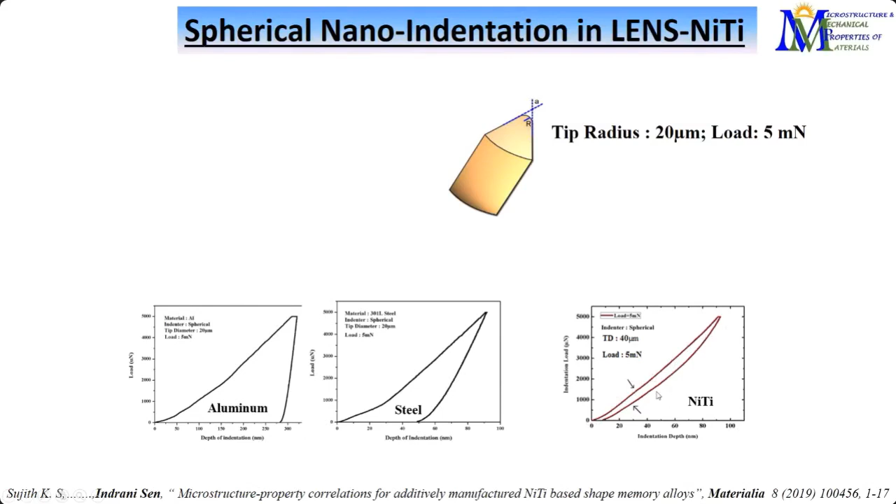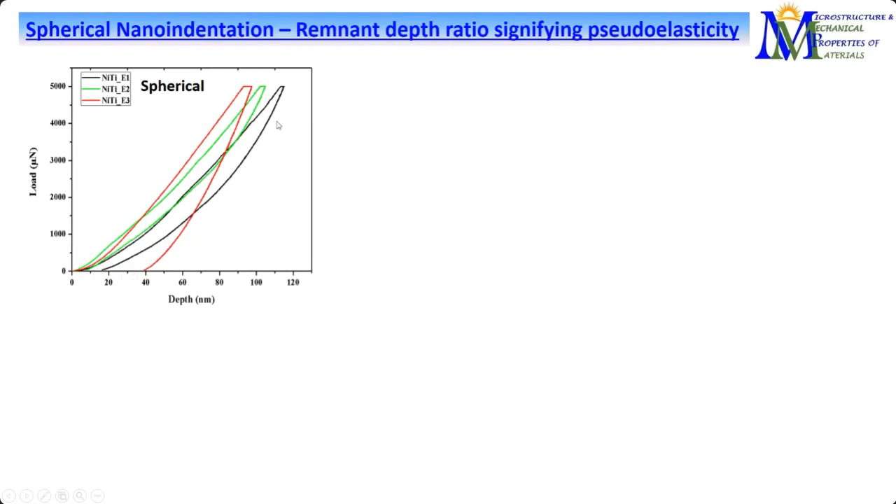Now, we require nickel titanium for applications dependent on its strain recoverability or shape recoverability. More than the strength, this is the critical property we are concerned with. So this study shows that if we use a moderate, lesser energy density while preparing, only then will we be able to recover the maximum amount of strain or shape.

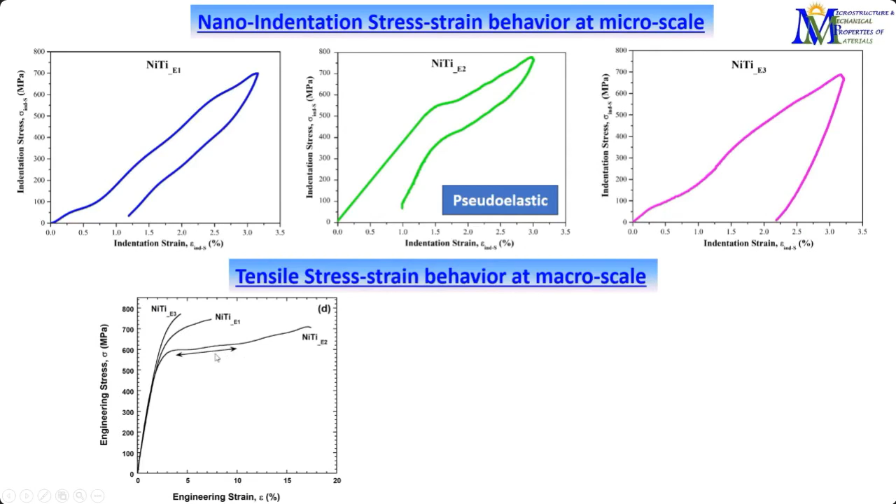So this is what we figured out, and we found a way to draw the nanoindentation stress-strain curve also. We have also done bulk scale testing to figure this out, and you can see that the one prepared with a moderate amount of energy gives us the nicest plateau and maximum ductility.

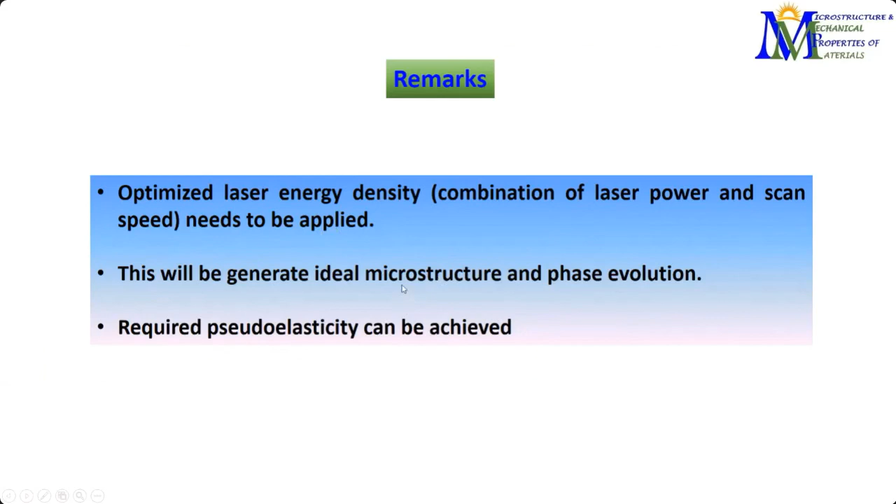So the bottom line is we require the optimized, lesser energy density. Instead of low or high, we require a particular optimized value to have a completely pseudoelastic behavior along with more or less ideal microstructure and phase.

Now, moving back to the next category of material: steel. Since we talked about nickel titanium so far, let's start with steel, which is also biomedical grade. Most things presently are made of 316L steel - biomedical implants like orthodontic arches and braces we use are mostly made of this 316L steel.

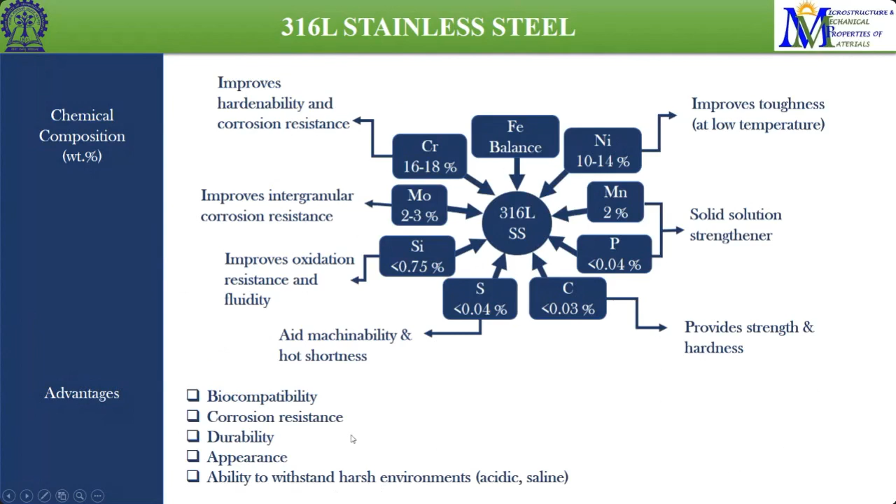This has several importance in the sense that it has high corrosion resistance, and it has the required amount of strength for such applications. It has biocompatibility as well, durability, etc., and is used for several things like surgical tools also - not only as implants but also used for various surgical tools as well as implants like hip joints, screws, many such things, as well as regular application in aerospace as well.

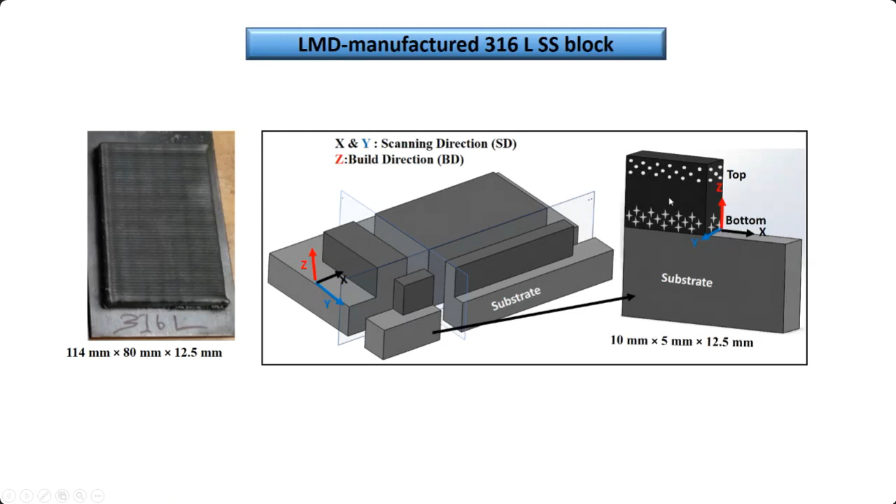Considering the wide applicability of this material, additive manufacturing is also being tried on it. We have an LMD manufactured block, a laser manufactured block, which we have characterized at different sections and cross sections, parallel and perpendicular to the build direction, and evaluated the microstructures at the top, middle and bottom.

So what we did in this case is, we had such variation in the microstructure, and to get rid of that we solutionized them. We manufactured the component by additive manufacturing, and then used the conventional heat treatment procedure to modify and homogenize the microstructure. We did the XRD to make sure there is no further formation of any phases, but the microstructure is getting equiaxed now.

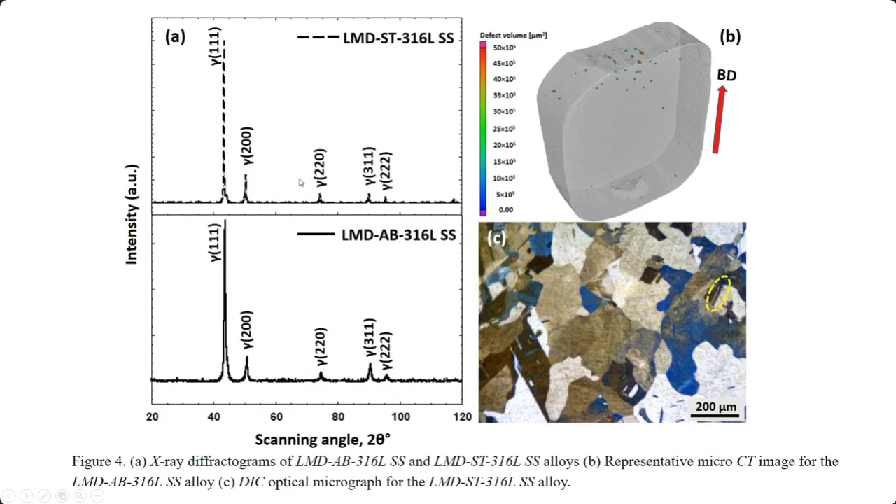Instead of a variation in the microstructure as columnar and equiaxed, coarse and fine equiaxed, we have a homogenized microstructure of equiaxed grains throughout, with no variation in the phase formation. So we simply solutionized it, and then did a detailed study on the hardness variation at various levels - micro, macro and nano hardness - as well as tensile testing of this.

So if we require an application that mostly thrives on improved toughness and ductility, we should definitely do some conventional heat treatment to the additively manufactured part so that we can achieve these properties easily, although it will still have a higher yield strength compared to conventionally manufactured materials.

That is what we have figured out, and based on our requirement we can simply do this. In a similar way, we have also studied the properties of 15-5 precipitation hardened steel. This is a kind of steel which can be hardened further if we allow it to precipitate out.

This is being prepared by DMLS technique, direct metal laser sintering, and we prepared a kind of structure with this. What we figured out is that the typical hatch structures and typical additive manufacturing structures are already there, and once again the differences in microstructure are quite apparent. We have columnar, cellular structures as well as equiaxed structures, varying with the build direction at every point.

Apart from the as-built one, we also heat treated it with the conventional aging treatment used for this precipitation hardened alloy, because unless we do this kind of aging treatment, we are not able to get the full benefit of the precipitation hardening. So we tried to implement the same kind of heat treatment used for conventional testing, and we could see that the precipitates could come out at such temperature changes.

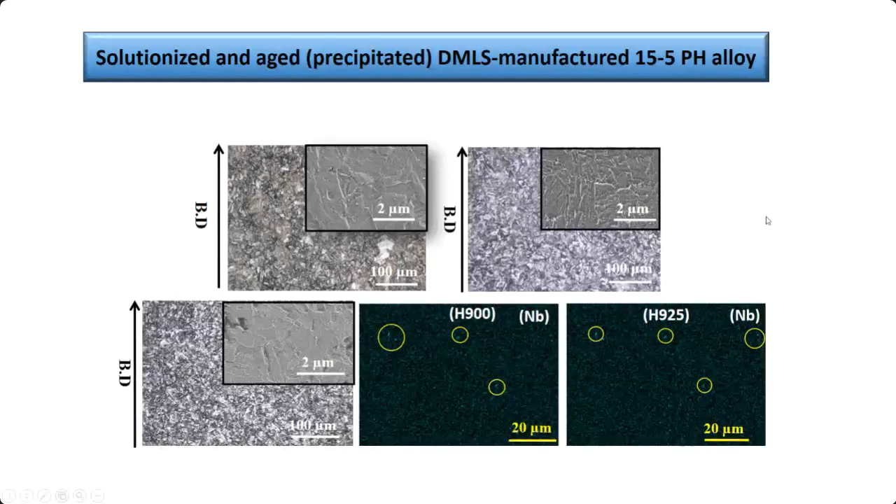We have figured out what is the optimum kind of heat treatment that needs to be done on these additively manufactured materials. If we want to use this precipitation hardened steel, we should use this optimized heat treatment as well, so that we can get the best of all the properties. We also did the XRD studies for all the structures - the as-built, the solutionized, as well as the aging treatment at two different temperatures and times.

The as-built structure has also been studied at the cross-sectional and parallel plane to find out the differences. We have also done detailed porosity analysis, and most importantly, the corrosion behavior. All this detailed systematic investigation has shown that if we are aging it for 900, the condition is here.

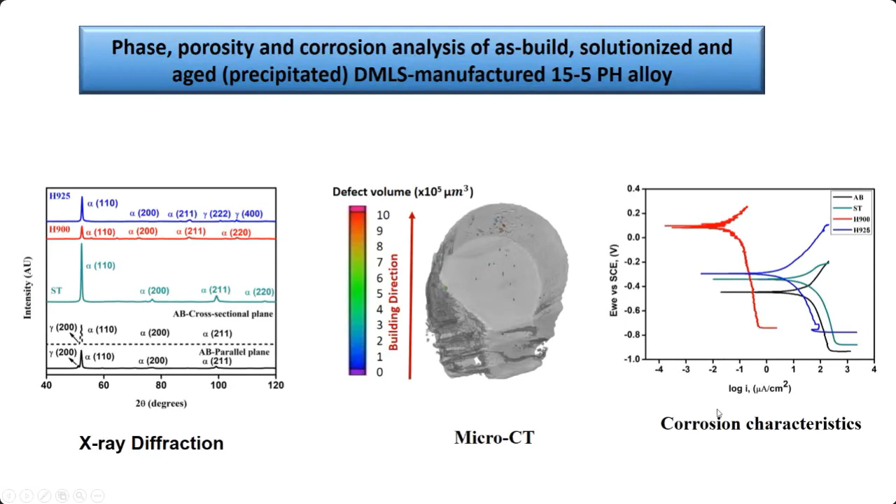The red one signifies the sample which is as-built and then heat treated at 900 Fahrenheit for 4 hours. We end up having improved properties, almost all kinds of properties, and very high corrosion resistance also. Considering its application, that will be a huge implication of property enhancement.

We were not satisfied with doing only the micro-scale studies, so we did regular tensile testing as well, using the extensometer to figure out which condition is best. Once again the red one, which signifies the aged sample, shows the best of all the properties.

So we could figure out that this condition is required. If we want to use an additively manufactured component, we still have to go through this kind of heat treatment to get the best of all the properties.

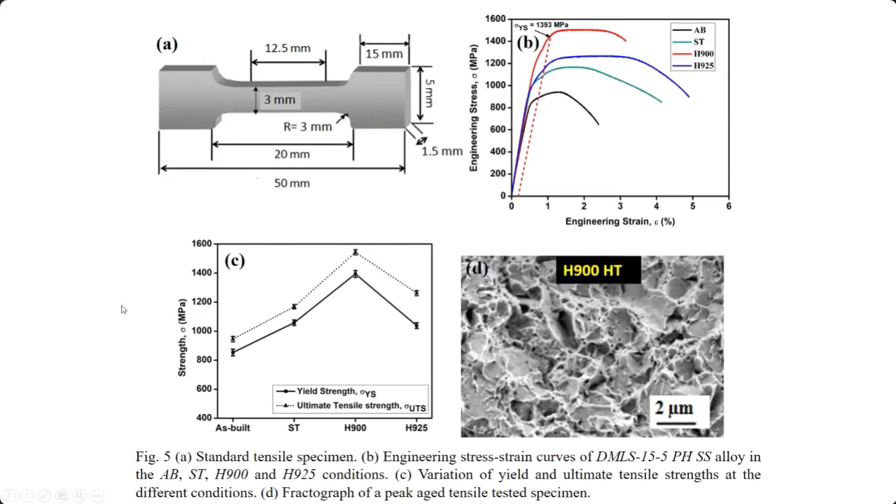The takeaway note is that overall, in metallic systems, there is a huge difference in the microstructure and the properties. There's an anisotropy along the build direction, and conventional heat treatment procedures in stainless steel components can actually help further homogenize the microstructure as well as achieve isotropic and improved performance.

So that was our goal, to make a component which will have even improved properties compared to the conventionally manufactured one. If we just do a little bit more along with additive manufacturing, we'll end up having that.

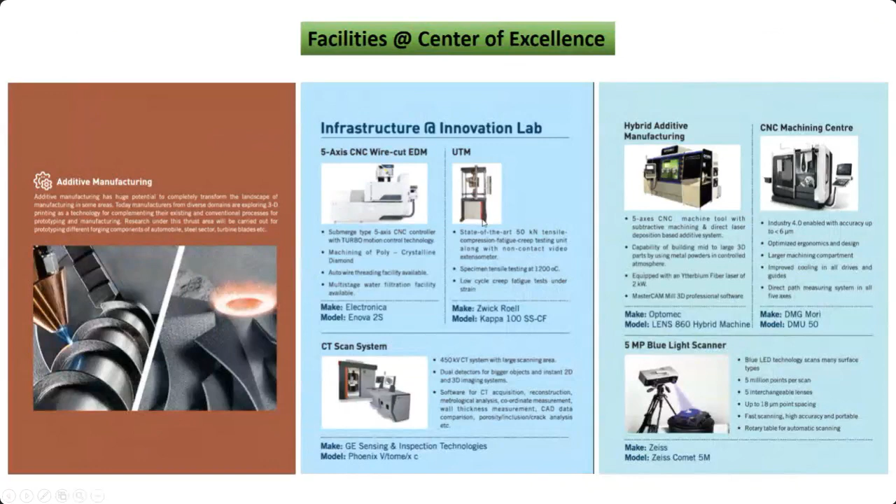This is the Center of Excellence that is built at IIT Kharagpur, the Center of Excellence in Advanced Manufacturing Technique, where we have several facilities including additive manufacturing, and several other characterization facilities also. I'm partly involved in this center.

We have several kinds of experimental facilities and characterizing tools. Of course, this would not have been possible without my students, there are many of them, as well as my collaborators all throughout the world who have supplied us materials. In India, there are the Central Glass and Ceramic Research Institute, the Bhabha Atomic Research Center, the Defense Metallurgical Research Lab, as well as collaborators in the USA and Germany.